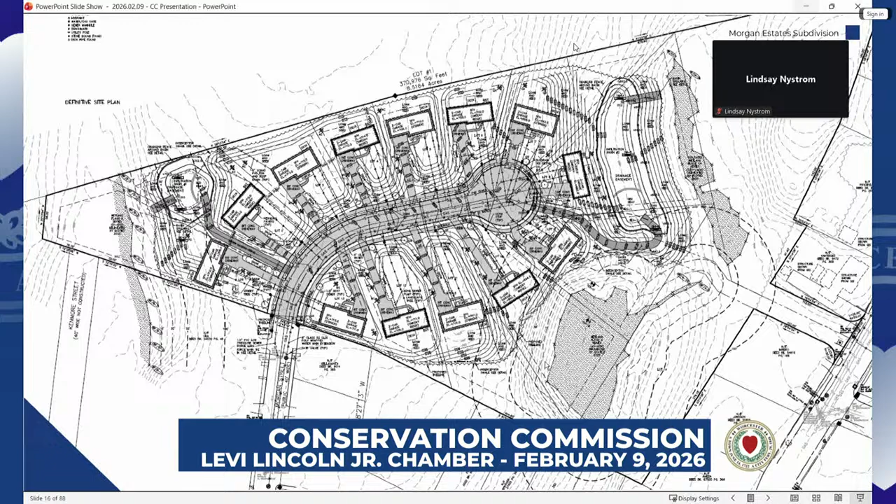One comment from staff was whether we could shift the work on Lot 10 to remove the retaining wall proposed at the edge of the 30-foot setback. We were able to shift it up as close as possible to the setback lines, and now the retaining wall has been removed, so it's just grading up to that 30-foot setback.

DPW also had comments - they wanted to see a force main sewer system instead of the gravity system, which eliminated the utility connections out to Malden Street. That was where the majority of the work was closest to the wetland line, so it eliminates a lot of temporary work in the buffer zone.

Based on that update, the limit of work on the whole property is right about 30 feet at the closest point to the wetland line. The other update, requested by the commission, was a phasing plan for the construction.

And the red line on the perimeter there is a wire-backed silt fence, an extra stable erosion control barrier for the portion of the site where the limit of work is adjacent to wetland resource areas, providing extra protection.

The color coding is different for stabilization timeline phasing. You also see the material stockpile locations with their own associated erosion control barriers around the down-gradient perimeter, and there are temporary sediment basins as well during construction.

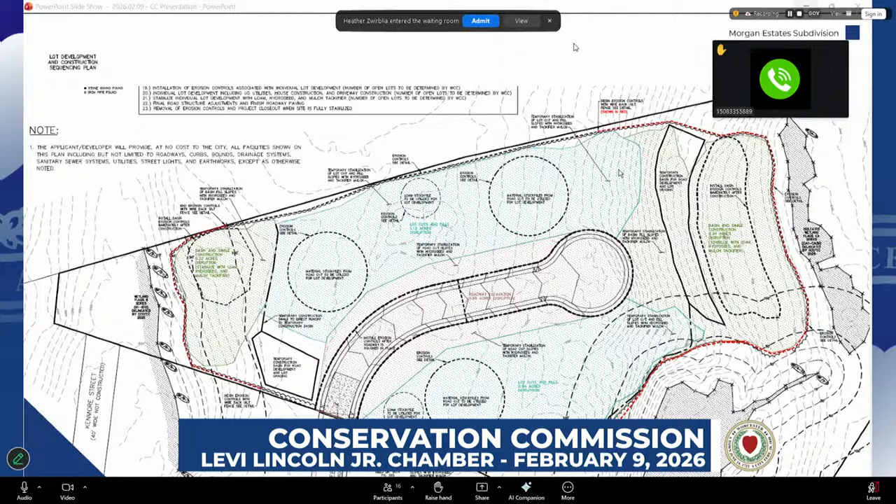If the city does allow approximate locations, what is the threshold for the word approximately? Within 1 inch, within 1 foot, within 5 feet? It is not written anywhere what is allowed when using approximate measurements. This is not something you can leave up to chance and opinion, but instead should be reinforced by accurate and scientific measurements. The report is filled with approximate measurements that should not suffice.

The applicant's stormwater report states, quote, restrictions on the use of this property are recommended for protection of groundwater. Use of salt on driveways and walkways is to be minimized, and use of pesticides, herbicides, and fertilizers are to be restricted or eliminated, unquote. Who is going to monitor that these items are not used? How can anyone prove that every person involved with this project would be aware of these restrictions and actually follow them?

According to the applicant's stormwater checklist, the applicant had checked off that, quote, calculations showing that the infiltration BMPs will drain in 72 hours, unquote. If that's true, what happens in the event of a multi-day storm where capacity is reached and exceeded before the 72-hour window? This will cause catastrophic damage to public and private property.

The applicant also checked off stating that, quote, infiltration BMPs do not adversely impact nearby wetland resource areas, unquote. However, in the event of a major multi-day storm, the BMPs will impact the wetland resource areas.

Lot 2 proposes a snow storage area extremely close to the gravel driveway easement for the detention structures. This driveway would be required to be clear of snow and obstructions at all times, as it is very important for DPW and essential personnel to access the structures within the easement. A snowblower's blowing distance would easily throw snow from Lot 2's driveway well beyond the storage area and directly into the gravel driveway easement path, thus preventing essential personnel from accessing the easement. How would the developer guarantee clear access at all times?

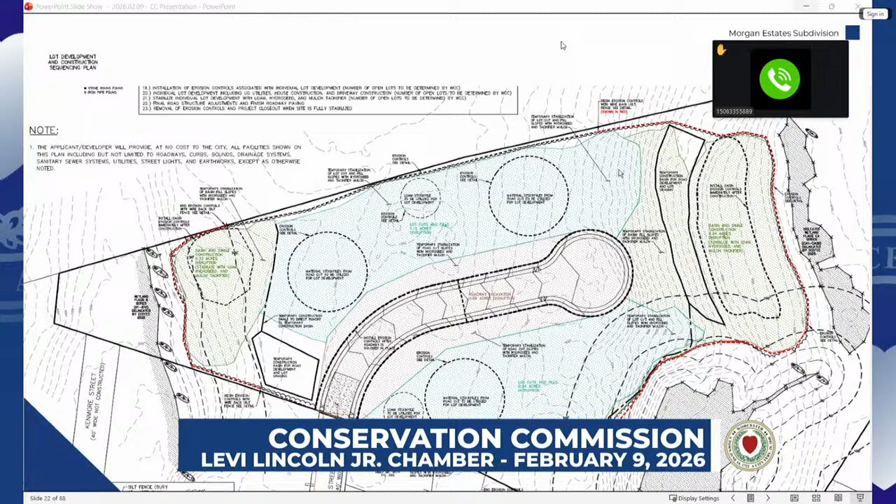I understand. So the purview of the Conservation Commission limits some of the things we can talk about based on the concerns you raised, but certainly many of the ones you raised are within our jurisdiction. First, I want to clarify, and believe the applicant mentioned this earlier, and perhaps you didn't hear, they did move the utilities from the Malden Street connection to Morgan Street, so they will not be as close to the wetlands as previously required if they were going to connect through Malden Street.

If you can show that? Yeah, which plans are currently available on the public website? Because these were very recent, like it was last week. I can double check what's up on the website now. Yeah, to make sure the public has access to the most recent set.

And the commission is also concerned about erosion, spillover, long-term maintenance and management of the property. We asked the question about who's going to be responsible for some of these drainage structures. I believe the answer was the city. Subsequently was the answer received. Could you just clarify that and make sure I'm not misspeaking? That's correct. That is correct.

What else can we address that the caller raised? One of the administrative items that was brought up, there was a comment about abutter notification. I did just want to confirm that I went through right now and did double check that all of the abutters that were on the certified abutters list were listed on the certificate of mailing that we received, which is what ultimately is required to demonstrate compliance with abutter notification. For, we can't say for sure if it ended up making it to the person, but as far as what we require, or what the regulations require for documenting proof of notifying abutters, that was satisfied by the applicant.

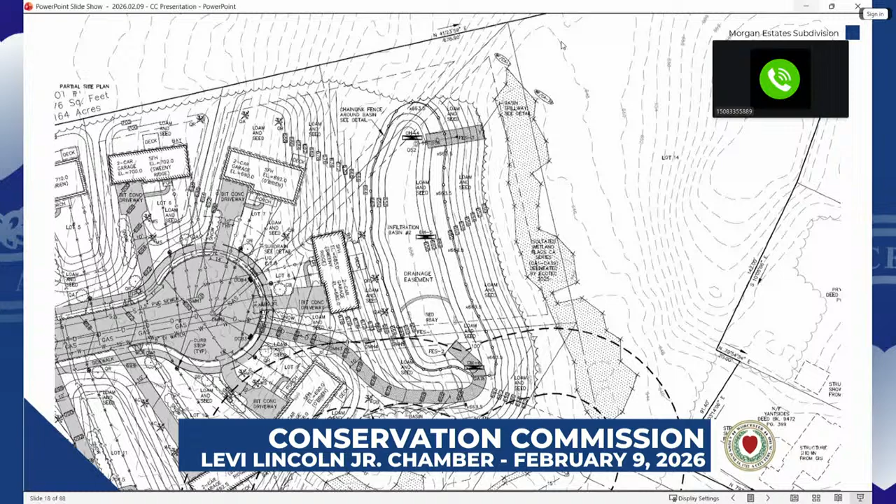Are those plans in the public listing yet? I did just update the plans that were on the city's website. But your planting plan, is that included? That's all included, it's in the details.

A couple more questions — there were some concerns brought up about inaccuracies and items going against city standards. One that comes to mind was a statement about inaccuracies in the report. Can you address that? I believe the narrative just approximated some of the distances because they varied, anywhere between 30 and 50 feet. The report said approximately 30 feet at its nearest location, but based on the plans provided and the survey work laid out, there is no work closer than 30 feet to the resource areas.

There was also a statement made about a reference to a different property that's not related — is that something we should address? I think it might have been a scrivener's error or typo. I remember one in the original submission, in the stormwater section, the reference to Fruit Street was an inaccuracy. It was a different community entirely, simply a typo in the report. Has it since been corrected? It doesn't affect the overall findings, it was just a typo.

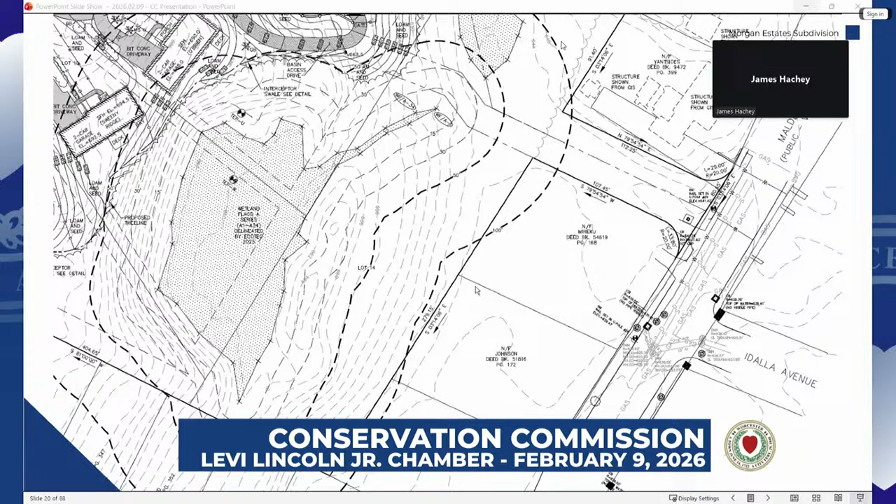Another thing I saw just looking at the layout of the project is, I think there's 3 or 4 of the homes that are being proposed to be built adjacent to, or facing onto the side facing Medfield Street, because Medfield is also up on a hill. I'm assuming all of these houses are going to have foundations put in place, and will this affect anything for drainage or possible flooding with these?

I don't know why these individual parcels, I guess they're going to be built according to what the developer says as they're purchased. Why were the developments of the actual foundations placed so far back from the street entrance? Again, kind of pushed back toward the Medfield area. If anything, that kind of digging and intruding in to put foundations, would that create some flooding possibilities onto the Medfield residents?

I would think residents there on that street, possibly downstream onto Malden Street, could also have effects. I don't know about the ones up near the 190 corridor, but certainly the ones facing, butting the end of Morgan Street and where Medfield Street continues down. I could think that we could certainly have some bad effects of flooding there, especially if the phasing isn't carried through and the developer doesn't provide things to guarantee that things will happen in those stages.

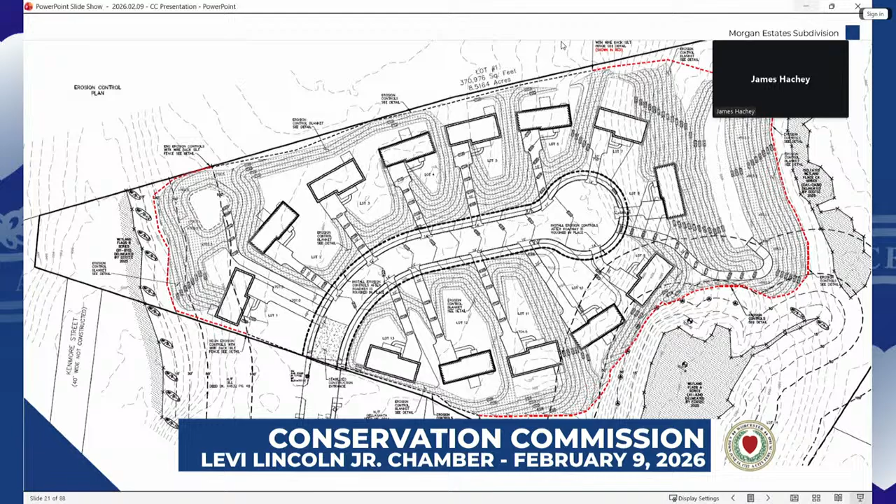Thank you. A lot of those concerns were concerns I raised last time as well, which is what happens in a work stoppage situation, what happens if suddenly the economy takes such a turn that this becomes, I'm going to just walk away rather than complete this project. I know some of it can be addressed with bonding in terms of completing a street, completing a sidewalk, completing utilities. I don't believe there's any bonding requirement on finishing the houses, and long-term maintenance of a silt fence on an unstable property.

I don't know how we really speak to that. The commission does have the ability to secure the performance of certain components of this work related to the purview that it oversees. In the past, the commission has secured site stabilization - typically the applicant would provide a cost estimate for hydroseeding a certain area, which would be run by DPW to assess if that's a realistic cost. Then the commission could require performance security in the form of cash, a letter of credit, or a bond. It's not done often, but it is an option, and it's in the ordinance and regulations that the commission has that authority.

Understood. Are you anticipating any changes from the planning board that would impact what we're looking at tonight? I don't. We've been postponed before the planning board for a number of meetings because it's their current purview to open and close a hearing in one night, so we've been asked to continue a number of times to address comments so they're fully addressed when the planning board opens the hearing. We've addressed all the comments presented by staff and city departments, so we fully expect the planning board to open and close the meeting next Wednesday night without changes.

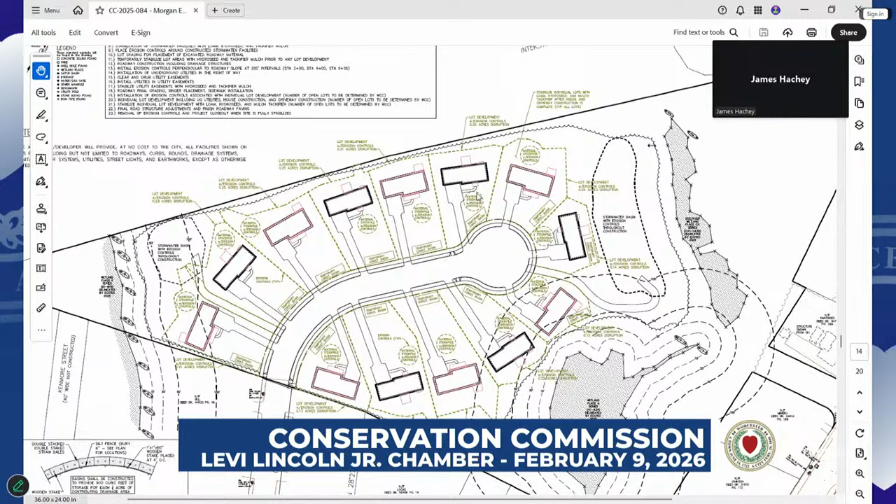Some of the comments are beyond the scope of this commission, certainly. The concerns, I think, are shared by all of us in a project like this, when you're taking undeveloped land that has been, for all intents and purposes, nothing but woods for multiple generations of families in the neighborhood. It's upsetting, it's concerning, it's all those things when you have a project like this next to you.

Anything we can do to mitigate the concerns of the abutters is appreciated, both for us as a commission having to make a decision based on the rules and regulations, not whether we like this project or don't like this project. If you are in full compliance with the regulations, then we really have no choice but to approve the project.

I want to make sure the abutters understand it is a 'we'd like to see' kind of situation. We can ask for more trees. We can ask for the limit of disturbance to be as tight as possible around this site. We can ask for vigilance on the part of the people responsible for maintaining this project site while it's under development, including people managing your stormwater reporting.

It is on the city to make sure things are enforced. If neighbors notice something going awry on the project, they certainly may make a phone call and say, I see sediment flowing into the wetlands, I see something coming onto my property. They are sort of the eyes and ears on behalf of all of us if this is allowed to go through. So I would encourage them to pick up the phone and call if they see conditions like that on the site. Nobody wants to see a construction site get out of control.

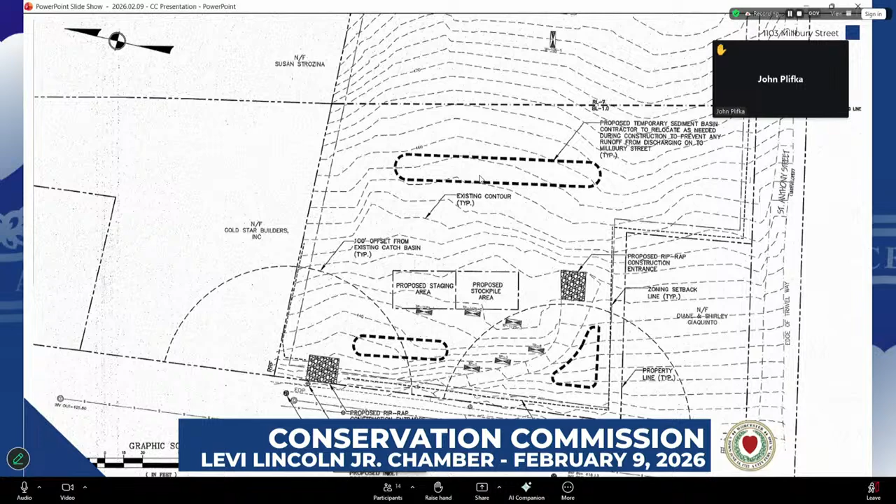We're here for the construction of a 40-unit apartment complex located at 1103 Millbury Street. Since the last time this project was in front of this board, we received our ZBA approval at the January 12th meeting. Some minor changes to the plan set, the biggest one being that staff had expressed some concerns regarding the proposed cut slope in the rear of the site.

We did some additional testing in that slope in December, I believe it was December 9th. We did a test pit that we went 17 feet deep and we observed no evidence of groundwater or weepage. We also, since the last time this has been in front of the board, have significantly reduced the amount of proposed grading in the rear of the site, so not only reduced the amount of required earthwork, but we were also able to maximize the amount of natural buffer at the top of the slope.

We had been issued a memo from staff that I believe we've addressed everything that was asked of us, but that's kind of my quick flyover. I'd be happy to answer any questions that the staff or board members might have.

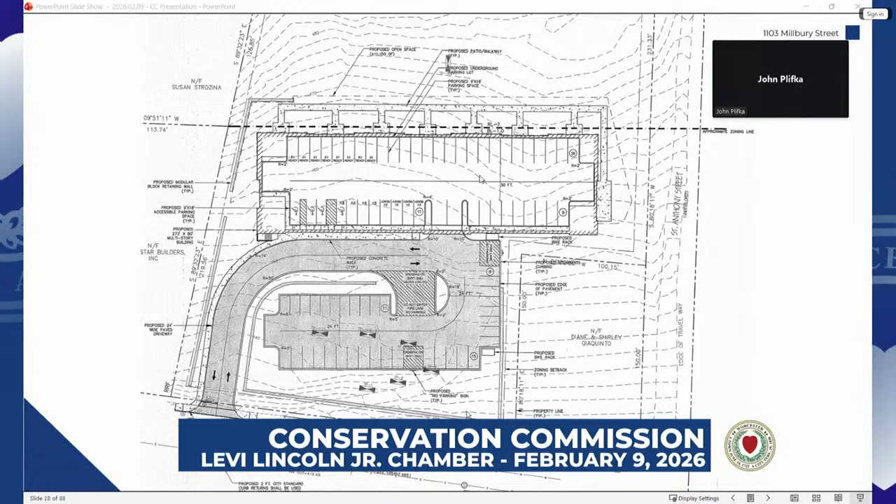Staff comments? Yeah, so like John said, our main concern when this first came in front of us was the huge cut in the slope at the rear of the site. So seeing the reduction in grading there is appreciated. I think at first it was like a 16 to 20-foot cut in some places, and now that's down to 8. So from a perspective of potential groundwater breakout or just general issues during or post-construction, this alleviates a lot of those concerns.

Riprap is now proposed on that back slope, which we don't necessarily love seeing as riprap slopes. I think we would have a preference for a vegetated slope, but if that's what's deemed necessary for the steepness of slope, that's fine.

Yeah, like John said, we issued a memo. We had an initial round of comments, I think most of which we discussed at the last meeting. For the most part, those have been addressed through the plan revisions that we've received. Similar to the previous hearing item, we'd probably want to see some more calculations and sizing details for the temporary sediment basins prior to construction, but again, that's something that we could easily condition as a condition of approval if the commission's ready to move forward with this item.

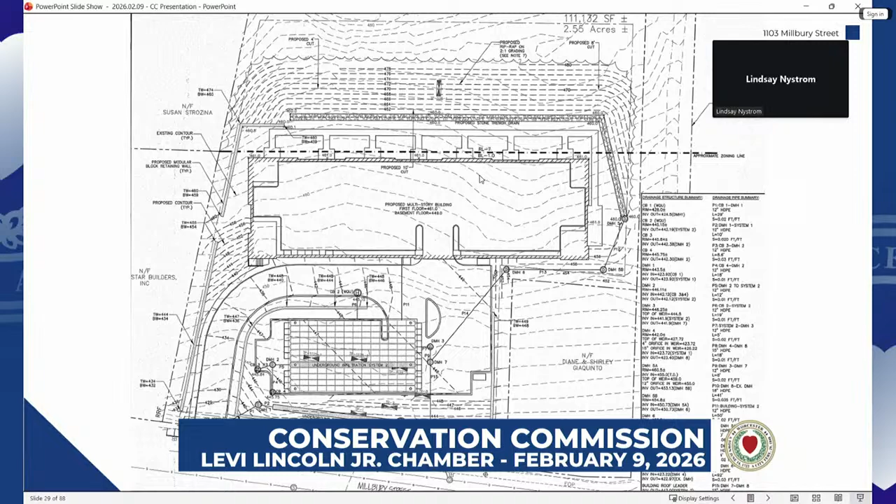Make a motion to issue the orders of conditions as described? Second. Commissioner Canton? Aye. Commissioner Nystrom? Aye. Commissioner Fertoni? Aye. You're all set.

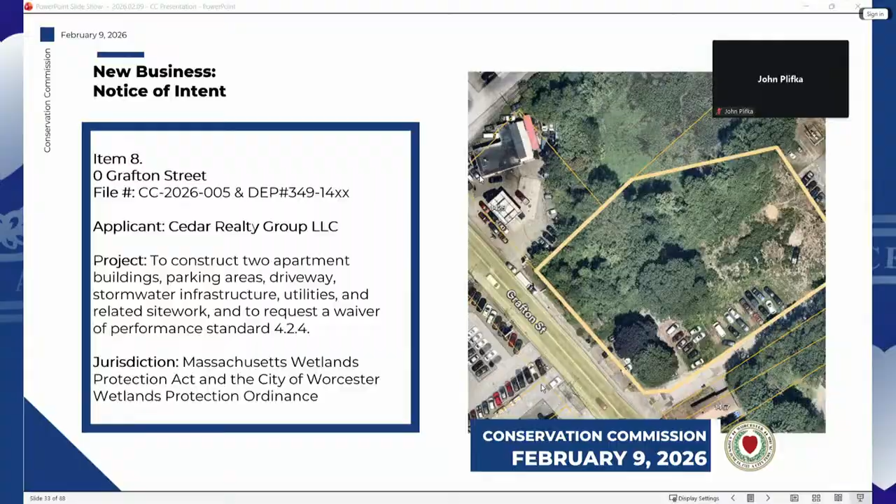Good evening, Madam Chair. My name is Andre Cassis, I'm the general contractor. Joseph Zrej, I'm the owner of the land on the property. Thank you. And I believe we should have David online - he's David Sadowski, he's the engineer. I think he'll be doing the presentation.

Good evening, Mr. Chair. Good evening, Chairman and board members. My name is David Sadowski, I'm the principal of DJ and Associates. Can you hear me? Yes.

Before you is a proposal for two 12-unit apartment buildings to be placed on the parcel known as 0 Grafton Street. It's actually located between 1429 Grafton Street and 1461 Grafton Street, near the Worcester-Millbury town line, as shown on the plans.

We have two different detention basins in the front and the rear of the property, and we also have an infiltration basin to catch the rooftop of each building. The site will be built in 2 phases. We're showing the overall site here. The first building will be built first, with the infiltration from the rooftop going into that basin, and also the roadway runoff going into the front stormwater basin.

The stormwater basins were calculated for the 2, the 10, the 25, and the 100-year storms. All the information was submitted and reviewed by Planning and Regulatory. They noted that we didn't use the high end of the values for the 100-year storm, so we revised the calculations and used 10.8 inches of rainfall in a 24-hour period. Both basins work with those revised calculations.

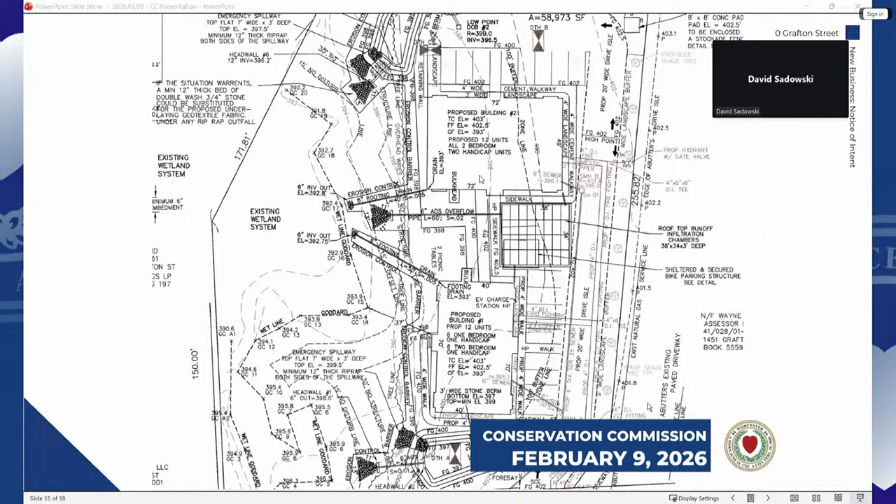Okay, thank you. All right. Commissioner Kenton? Aye. Commissioner Nystrom? Aye. Oh, Commissioner Kirshner, you can vote on this one. Aye. Commissioner Fatoni, aye. Okay, so we'll see you later in March.

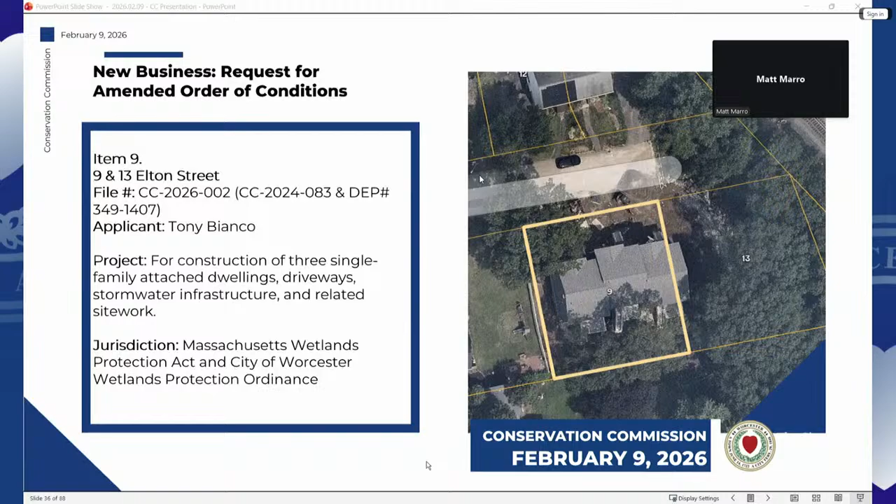Hi guys, can you hear me okay now? Yes? Thank you. Matt Marro here for the applicant, Tony Bianco. Are you guys going to share screen or did you need me to? Oh, there you go. That answers that one.

My understanding in reviews by DEP of the extension request or the amendment request -- originally I had submitted it with the restoration plan as part of the amendment. Those have since been separated out, so they're now two separate documents. That's about it, it's fairly straightforward. It's an attempt to administratively remedy the record while allowing, under enforcement, for compliance with cleaning and replanting of the area that had been touched.

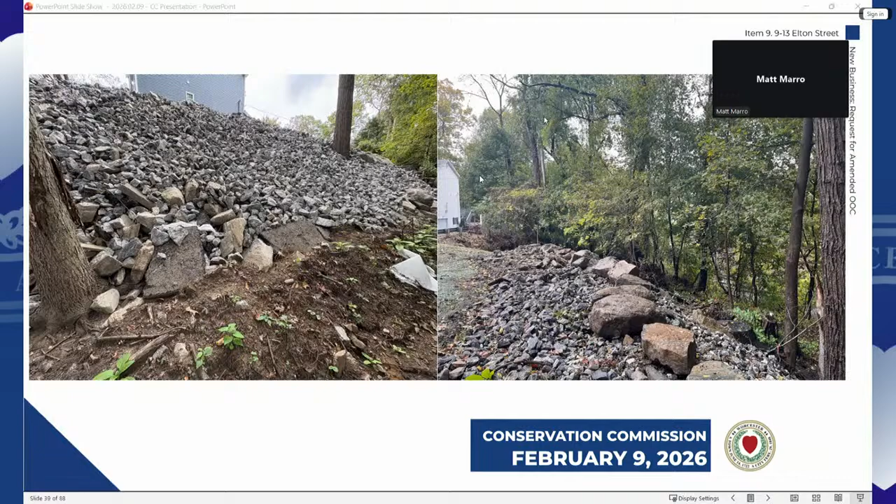Correct. Okay, so if I could interject here? Yep, if that's okay? Go ahead. Eric, can you go back to the plan that I submitted, if you don't mind?

So as imposing as the riprap looks on your drawing, it's not the entirety of the riprap that's within 30 feet of that wetland. It's the majority of what is on the northern side by the blue line that is marked in for the restoration. And even though the documents are separate, I would point out that the way I wrote my restoration plan was to allow for a more shrub-layered planting than what was there.

What was in that area that went to the area that I flagged for the drainage outlet was very thinly wooded, and it was mostly full of trash from the street spillover. So we're going to not only make sure that area stays clean, but we're going to do a really good restorative planting as a buffer area. So what comes off of that stone will go into an upland/wetland buffer.

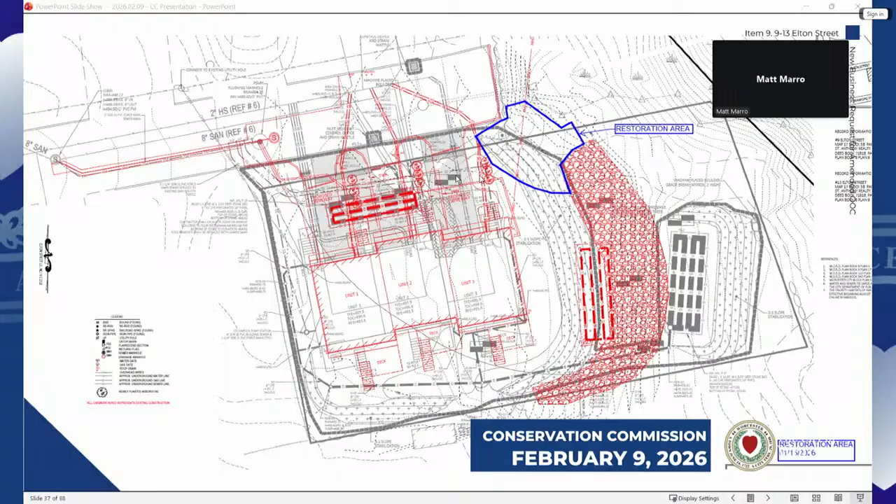General question on the page south of the red riprap - is that crossing into adjacent properties? Is that what I see there? It appears to be. Are those the owner's properties, or is that someone else's? I can't answer that question, I don't know. I was just concentrating on the administrative replantation, I didn't even think about this area. Similarly, did not really look at that side. I'll speak to my client about it. Based on GIS information, it looks like a separate owner, so that should probably be updated as well.

Did the original limit of disturbance follow a tree line or something? Why does it move off of the property line? The original limit of disturbance stays on the property line - it's the solid black line that's straight at the bottom, and the limit of disturbance is the dotted gray line. That's this line right here, that kind of goes up and around. So it is off property here where it's in the street, but the rest of it is within the property bounds. No, that's not what I meant - I just meant it probably isn't even relevant, but why wasn't it following the property line? Is there some natural feature down there it was meant to protect? I think the original intent was just to limit the clearing to the max extent possible. I remember when this was in for permitting, we were questioning if it was going to be feasible to get the machinery down there through that small path on the south side of the plan.

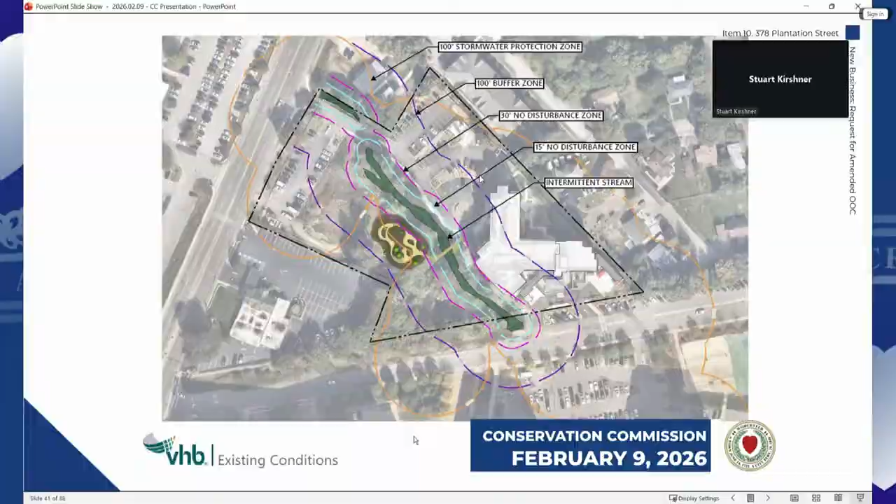So we are here tonight to discuss both the facility itself adding 24 additional beds and 4 additional treatment rooms, and therefore we are providing ancillary parking to meet the zoning requirements on site.

This is an illustrative of the parking expansion that is just off of that upper parking lot adjacent to Plantation Street. The expansion is 32 additional parking spaces, heading towards the Healing Garden, where we have 2 terraced retaining walls with a 10-foot landscape section in between to allow for a nice terraced wall setting with landscaping in between. Those walls are both about 6 feet tall, and they sit outside of the 30-foot no structure zone.

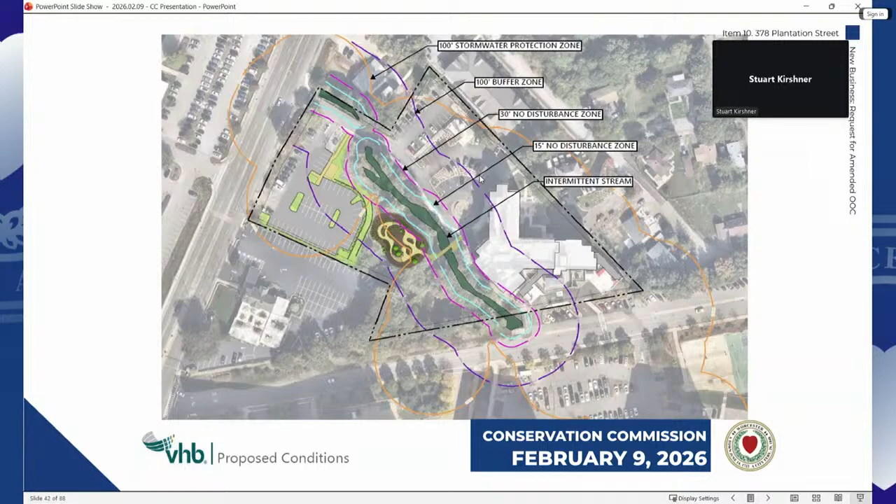We are providing a sidewalk connection from this parking lot expansion to the existing sidewalk that takes you down to the main entrance of the facility, along the existing upper parking lot area. If we can switch over to the grading and drainage plan.

Our limit of work from the parking area is pretty much right at the existing back of stalls, and everything is graded down to 2 catch basins in the center of the driveway for the parking expansion. These catch basins will then enter a closed drainage system, go through a water quality unit structure, and then there's a subsurface infiltration system. We do have a bit of an outlet control structure that eventually heads to a flared end section.

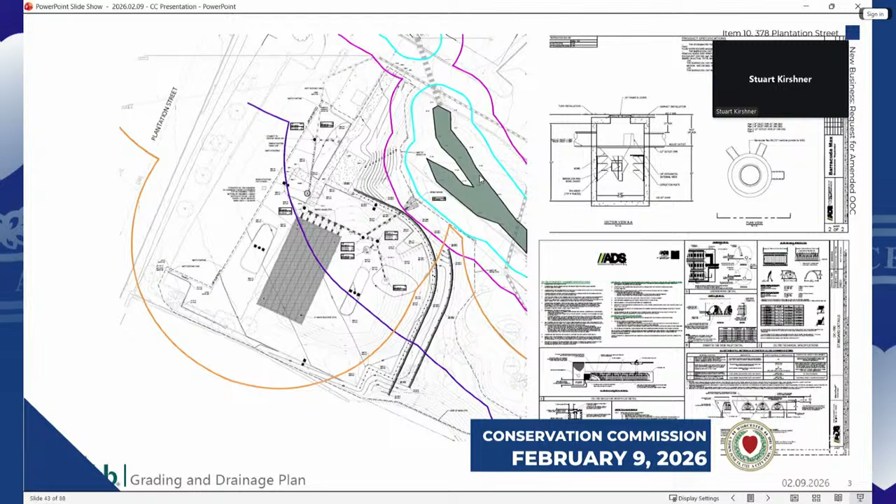Not to bring up riprap again, but we are proposing a riprap apron within the 30-foot no structure zone. Everything else, there's some minor regrading between the 30 and the 15-foot buffer zone, but everything else is pretty much outside of that 30-foot no structure zone, like the retaining walls I mentioned as well. I believe staff did provide some comments to us, and we've reviewed those and addressed them in a response to comments letter and updated plans that we shared. Happy to answer any questions regarding staff's comments or questions from the commission.

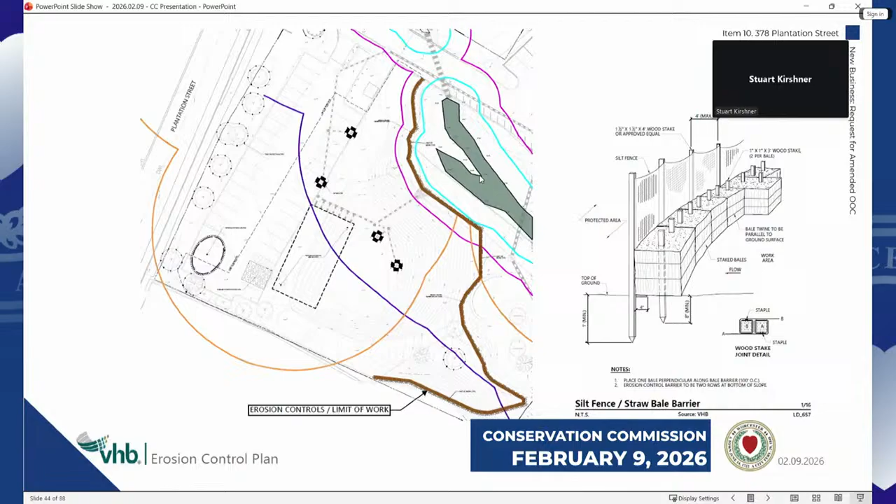Yeah, so we had some questions about stormwater report calculations, which were addressed in the response letter. And then, as Derek mentioned, we also had the comment about the riprap slope and the interpretation on structures in the 30-foot buffer. Based on previous discussion, is it possible to adjust that pipe so that the pipe outlets outside of the 30, and you're just having the riprap within?

I think so, we could redesign that. There's where the sidewalk is, and then there's actually a shed pad as well that sits just off the sidewalk. We could regrade the area behind that and pull it in a little bit tighter to the wall just to get that pipe to sit right outside the 30-foot. The riprap section would likely need to extend between the 15 and the 30, but we could definitely look at bringing the pipe and flared end section out of that.

I think we've discussed the topic a lot tonight already. As long as we're consistent about applying the regulation, and also consistent about making sure we're doing everything we can to get it as far out as possible, I think staff will be fine with it.

Did you at any point consider going up instead of out with parking? This small wetland area is now fully encroached upon by impervious surfaces between buildings and parking lots on all sides. Was there any thought to going taller rather than wider with parking to get you the spaces that you need?

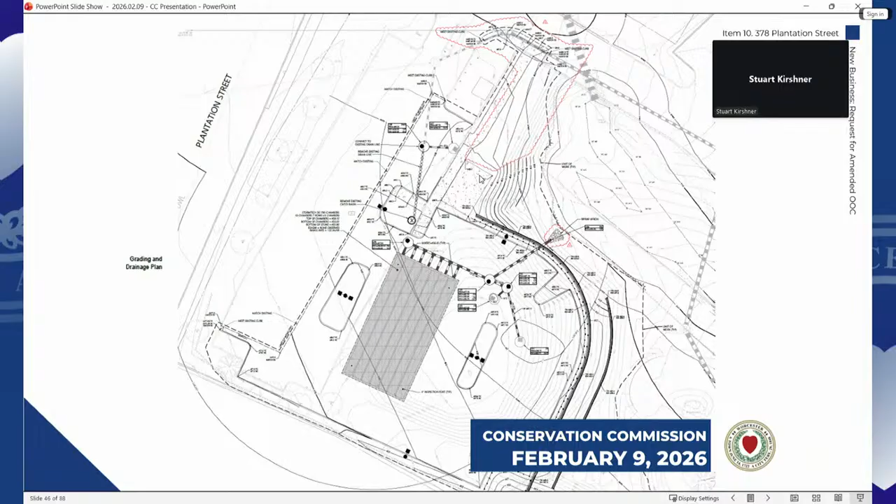We have looked at other parking solutions on the property, especially in this upper lot. There's really not even enough width. It's only a single drive aisle now with double parking on both sides, so there'd be no opportunity for ramps to create a second level in that location.

And then in the other part of the project, which is on the other side of the wetland, it's into a steep bank hill right now. So those options really have been off the table. We'd love to put more parking on this project, as it would help all of the staff, but this is just a requirement for visitors by zoning regulation.

This is more a question to staff, and it's more a cosmic question. Our zoning that requires us to provide spaces for cars is often in conflict with our requirement to not have so much impervious surface in the world. Is there no workaround for limiting the amount of parking in favor of not developing this site so completely? It sits right above Lake Quinsigamond. Everything that falls here eventually falls into Lake Quinsigamond.

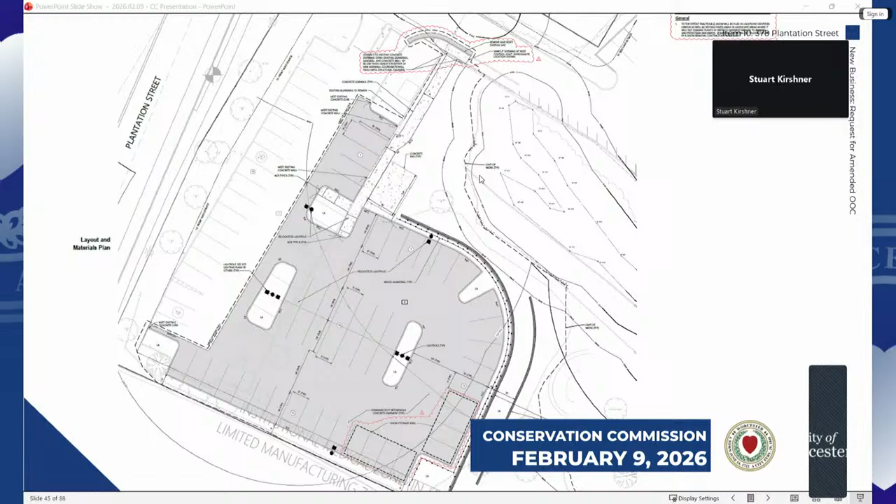We are providing trees within the landscape areas, and substantial plantings between the two terraced walls, and the separation from the lower wall to the healing garden as well. So at this point, you've maximized the capacity of the building, and you should not need any more parking once this is in place.

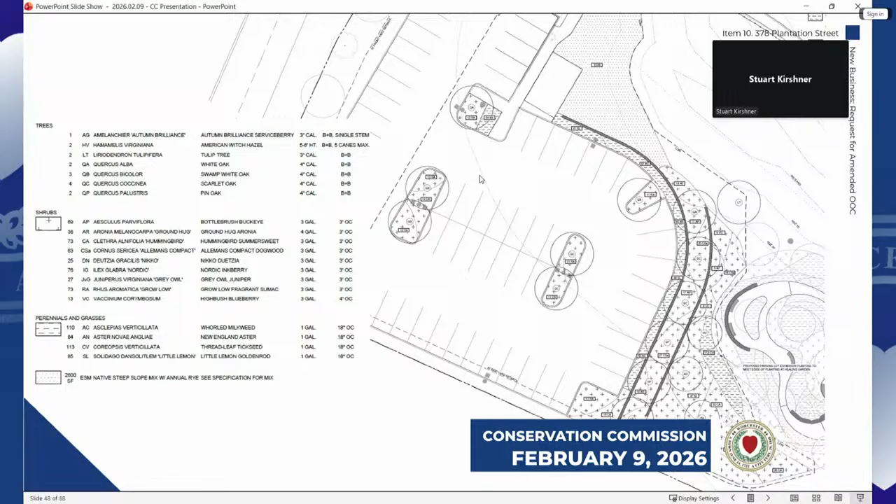Correct. So what he mentioned earlier is that we went back to the state. Originally, the building was built for 72 beds. We were able to expand part of our addition to be three stories taller on the far right side of the building. That created the opportunity for 24 more beds, which this community needs very actively. There's over 100 people in the emergency department right now waiting for space. So by adding more beds, it creates the challenge for more parking, which is why we had previously cut this area of the lot and bermed it with soil, with the intention of doing this.

Any other questions from commissioners? I don't suppose we have anybody on the phone or here? Nope, people have had enough.

So we are requesting the movement of the pipe and any other hard structure, other than the rocks, out of the 30-foot buffer, and you say you can probably accomplish that. Correct, yeah, we can regrade along that top retaining wall and move the pipe outside the 30-foot buffer.

Is there anything else we need to see, or can we vote on that condition? Yeah, so we should follow the same procedure as we would for a Notice of Intent, just by closing the hearing and then discussing the amended order of conditions after. Okay. Is there a motion?

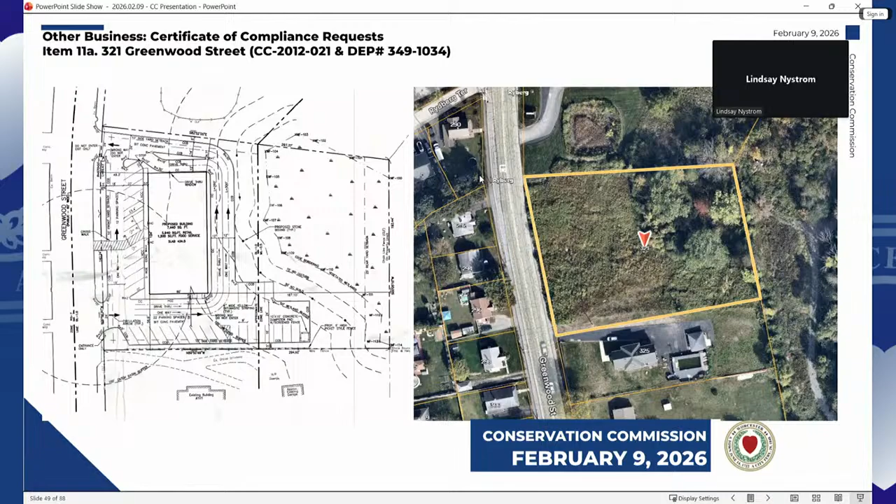All right, up next we have the Elm Park Dredging Project, which was permitted back in 2022. I believe Paul is online and can talk to the project. Yes, I am, this is Paul McManus. Can you hear me? Yes. Thank you, again, Paul McManus from EcoTec.

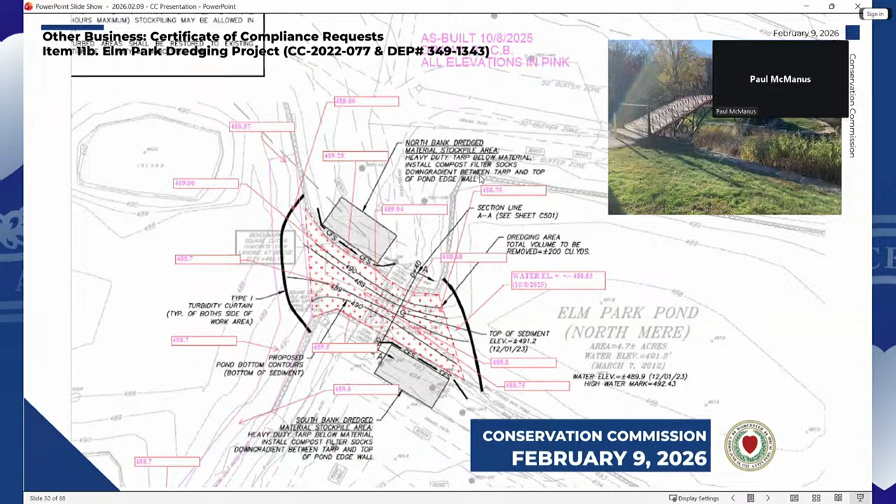Staff comments? No comments from staff. Commissioners? No comment. Is there a motion?

Motion to issue the certificate of compliance? Second. Commissioner Canton? Aye. Commissioner Kirshner? Aye. Commissioner Nystrom? Aye. Commissioner Fatoni? Aye. Thank you. All right.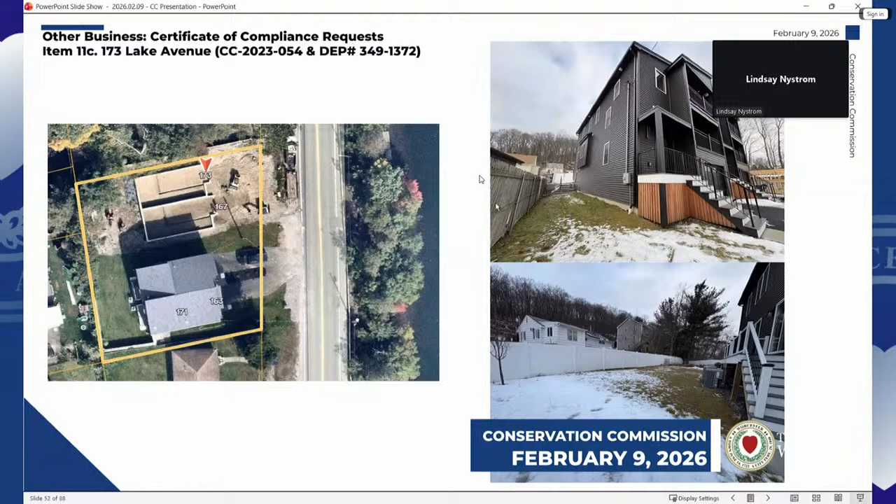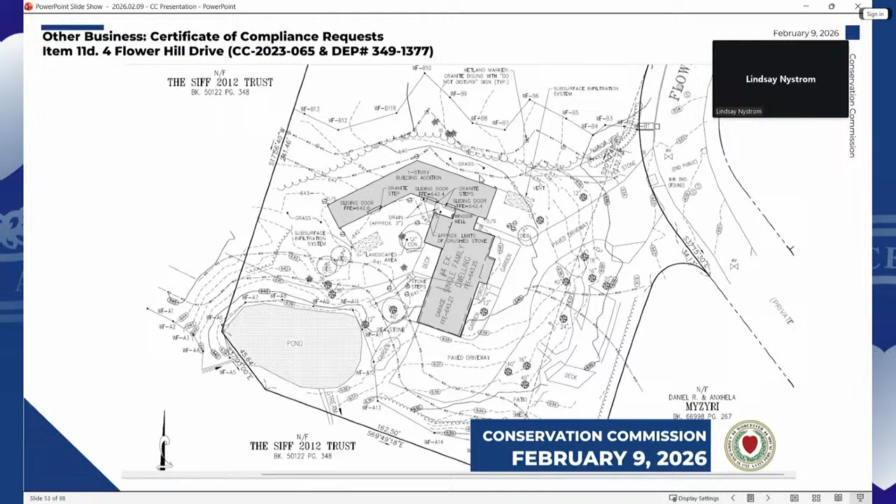All right, and then we have 4 Flower Hill Drive. This was an addition onto a single-family home with stormwater improvements. An as-built plan has been provided along with a letter from an engineer certifying that the plan was completed according to the approved plans. They installed their permanent markers, which honestly, I think they're the best permanent markers I've seen, with the cute little beaver.

Going to recommend them from now on? Yep, this is my go-to photo when I share it with applicants. But yep, they're looking for a complete certificate of compliance. Staff did visit the site back in June, and it had pretty much grown in, and aerial imagery from September showed that it was grown in even better than when it was in June.

Okay. Motion to issue the certificate of compliance? Second. Commissioner Canton? Aye. Commissioner Kirshner? Aye. Commissioner Nystrom? Aye. Commissioner Frattoni? Aye.

All right, and last one. So this is for construction, this is 241 Lake Ave. This was permitted back in 2022 for construction of a single-family home. This was part of the old Four Seasons property that was divided off. So one of the new homes built on this property, divided off on a lot.

They did come back in 2024 to permit the deck leading down to Lake Quinsigamond. An as-built plan has been provided confirming that, and a letter from an engineer has been provided confirming that the project was conducted under the approved plans. So yeah, they're looking for a complete certificate of compliance.

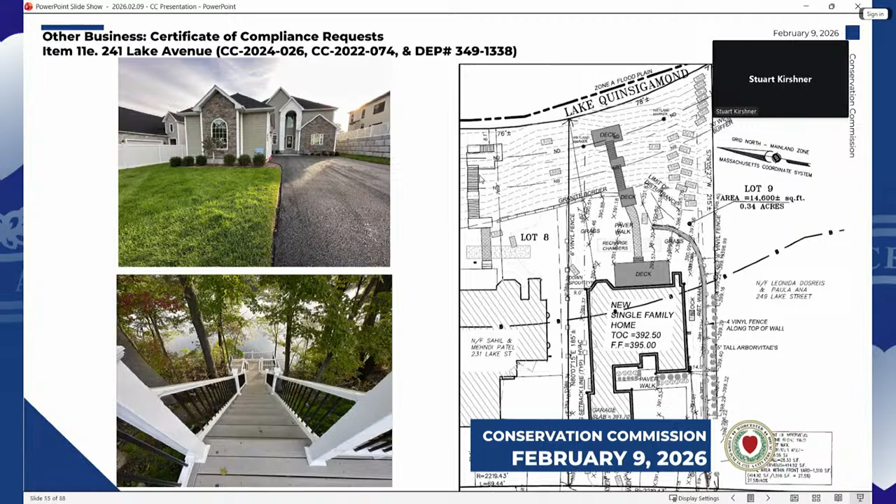Motion to issue the certificate of compliance? Second. Commissioner Canton? Aye. Commissioner Kirshner? Aye. Commissioner Nystrom? Aye. Commissioner Frattoni? Aye. Any enforcement order updates?

Sorry, my mic was off. 12S, 34 Eskow Road. We did get a stormwater review from the applicant's engineer. This is the site off of Route 20 where back in 2009, development had been permitted. They kind of rough graded a road and a large parking area, or what would have become a large parking area, and then the development stalled and never was completed. They had partially constructed some stormwater basins on the site.

So basically what we had asked them to do - there was an incident of turbid runoff that affected a wetland, which prompted the enforcement order. But we also asked them to take a look at conditions on the site as they were in 2009 versus now, and whether those changes in condition meet the stormwater standards. While they may not be intending to move forward with the project that was previously approved, the changes to the site have potentially impacted neighbors and the wetland resource areas.

So they did provide an analysis of peak rates. Peak rates to 2 design points were shown to increase. For design point 1, they increased in the 10, 25, and 100-year storm. And design point 2, just the 100-year storm.

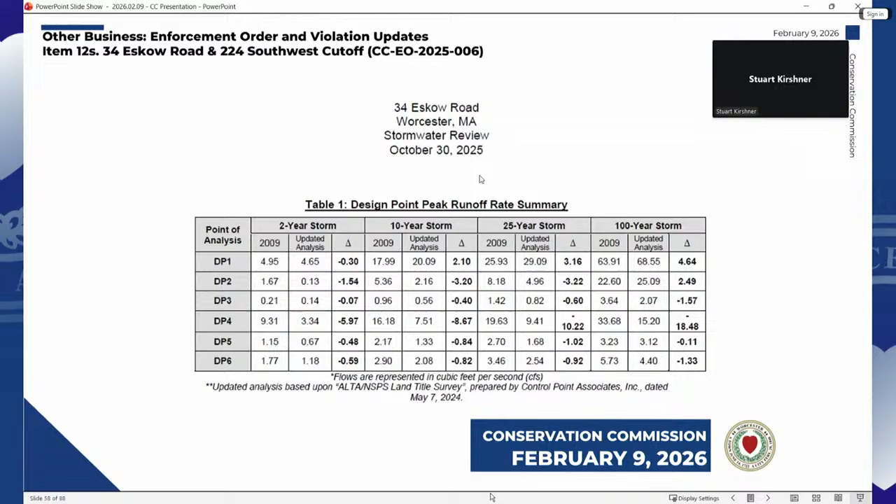So there were complaints that they've seen increased rates of flooding, just stormwater runoff from this property in general. The only increase shown by the calcs was during the 100-year storm, but that doesn't necessarily mean there's not more volume sheeting off the site in general. So one of our follow-up questions was whether any study of infiltration had been done in addition to the peak rates, because that's also an important piece of the puzzle in terms of stormwater compliance. And then also just questions about whether these partial basins actually function as they're supposed to in terms of filtering.

One of them is currently plugged to avoid continuous turbid flows to a wetland. I think there's a number of things that will probably need to be done. The commission's original enforcement order was, A, related to the turbidity in the wetland, which is pretty much resolved at this point. But B, was to do this analysis and then file a notice of intent for any site alterations needed to bring the site back into compliance with the stormwater standards.